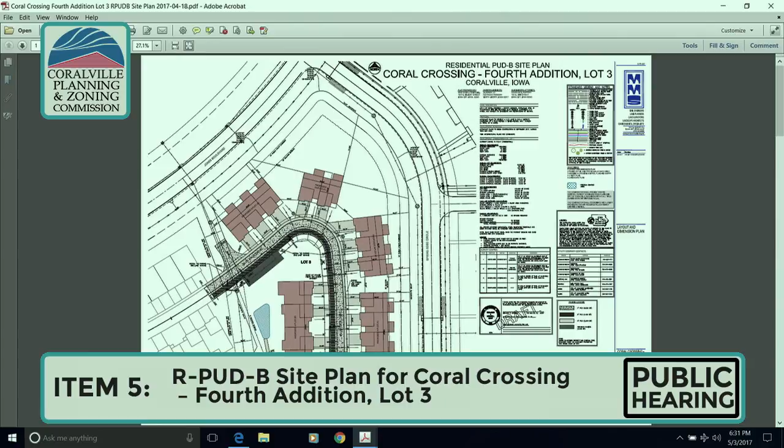Well, Jim, you want to just explain this to us? Yes, I will. Previously, we've done a PUD-B site plan for this area, and we've approved it. So they bring in each section that they do. This is the 4th Addition Lot 3, and there'll be another lot in the 4th Addition as well, already under construction actually. But this is just as the PUD-B site plan was. It's got 2 3-plexes, which you see up on the top, 2 4-plexes on the south edge, and in between a 3-plex and a 4-plex is a duplex. So they haven't changed anything. It's all as it was approved through the PUD-B site plan. So there's really no changes to discuss or anything like that.

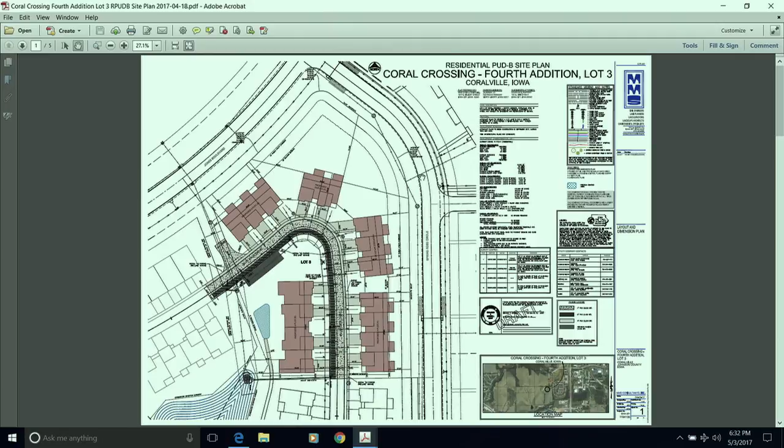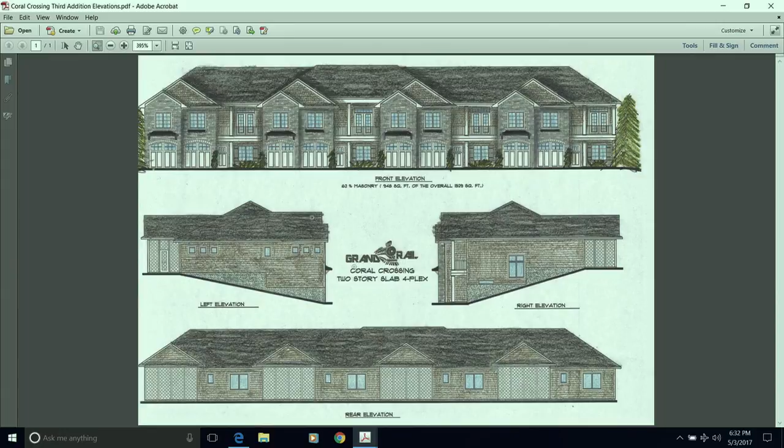I believe you have the building elevations in your packet. Primarily it's brick and siding on the front. This is a 2-story, you can see the brick. It's hard to see, but there's brick on the projections out of the building, and then some brick over the windows and around the front doors, and the rest is all siding. So these also were part of the PUD-B approval as well. We've looked at all of this before.

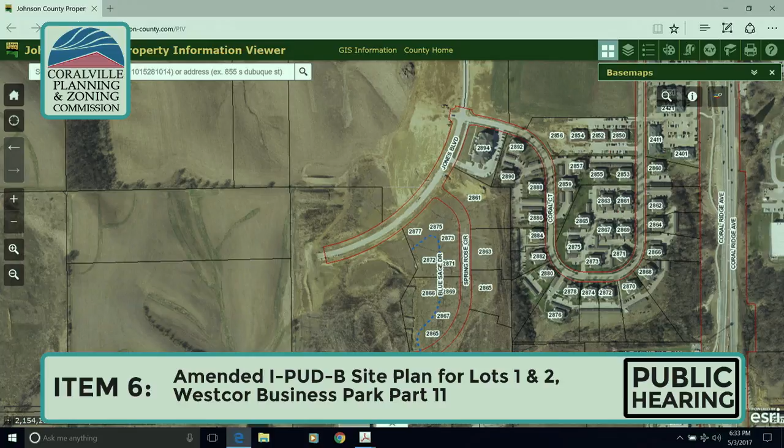Agenda item number 6, public hearing request by Zero Energy Systems for the approval of the amended IPUDB site plan for lots 1 and 2, Westcor Business Park, Part 11. Do I have a motion to consider the approval of the amended IPUDB site plan? So moved by Snyder, seconded by Taylor. Discussion.

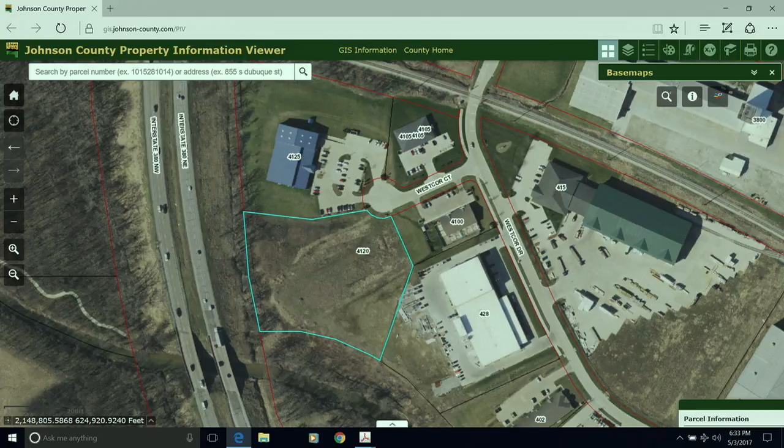This is, as it says on the submittal, Zero Energy. What they've done is acquire the second lot, 4120, that Scott has outlined in green, to add to their original site and their original building. And then just north of that at 4100 is Dogs Daycare, so you can get a feel for where this is. But what they have done is added lots 1 and lot 2 together. They've purchased lot 2, and on lot 2 they want to put another building. It's a 3,900 square foot building.

It's going to be part storage building. There's going to be some office areas in it, and they're going to have 2 dock doors, one on the south and one on the east, that they could back trucks into.

They will be loading their walls in here that they manufacture. They'll be loading those in there. They'll also be keeping things in here like the styrofoam insulation that goes between the walls and some

rebar and other material like that. Then as part of the site plan, they've incorporated all of their employee parking into the back of the building. As you can see where those white islands are, that is all spots of employee parking.

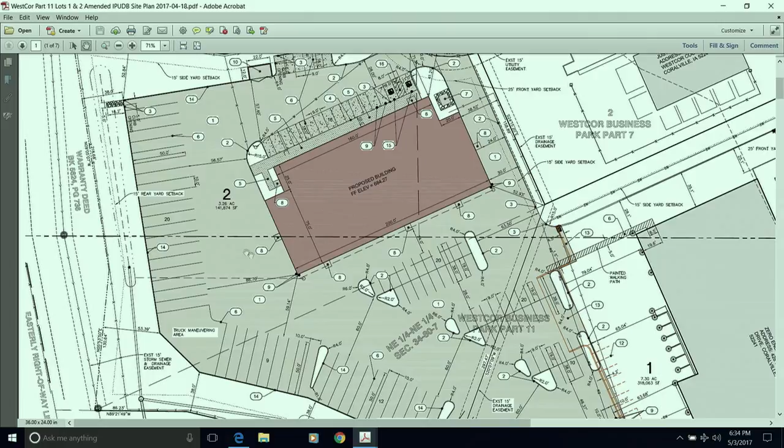And then around the perimeter of it, you'll see some long parking stalls. That is for storage of flatbed trailers that they're going to use to haul their preformed walls on. So there's 66 stalls back there, which is quite a few, and I'm not sure they'll have that many sitting back there at any one time, but they have the capacity to do that.

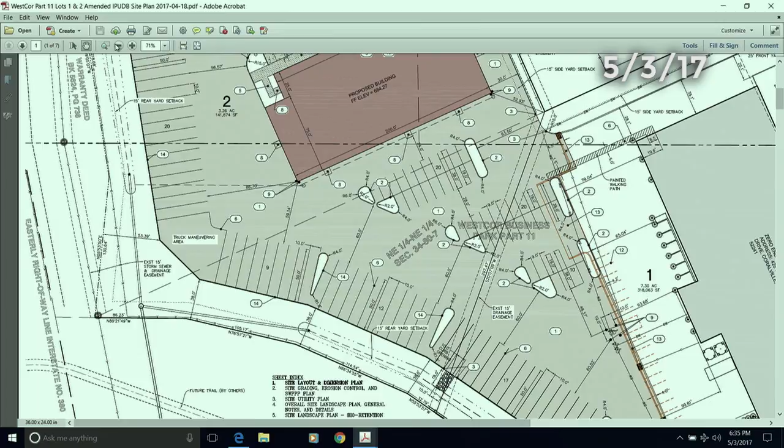So the building, you have that in your packet as well. It looks just like the other building, just smaller. Same thing - it's their preform walls, basically the same as their other building. So the front lower part is the office area, and the back part is the storage area and the loading area.

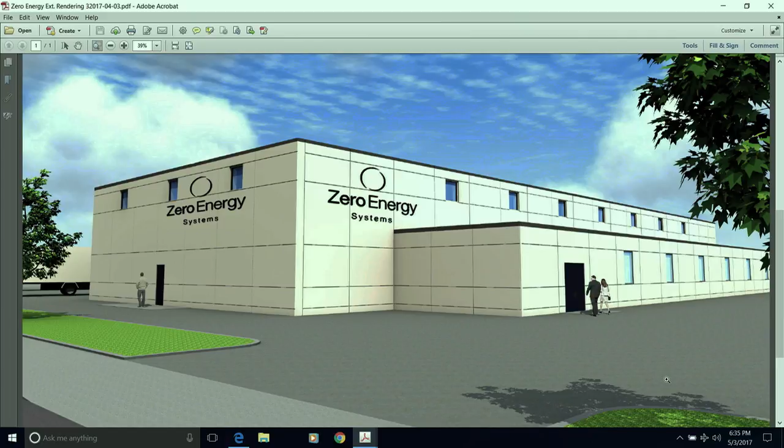going in out there. All right, we will now vote on the approval of the amended IPUDB site plan. All those in favor say aye. Aye. Opposed? Motion carries 5-0.

Do we have anything newsworthy for next month? We have several submittals for next month that we're just beginning - they just came in on the 1st, so we're just looking at them. We have 2 more additions in Coral Crossings, which we just looked at on the east side of Spring Rose Court. There are going to be 2 36-unit buildings in there, lots 2 and 5 of the 5th addition.

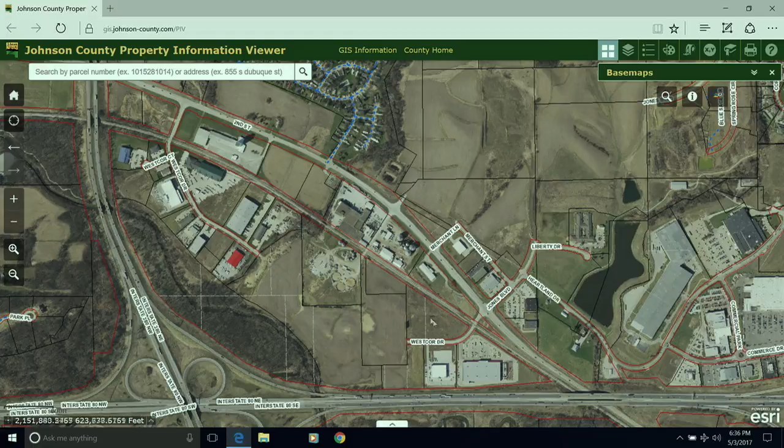Let me get my brain going here. What else do we have? There's Westcor... yeah, we have Westcor subdivision, which is the triangular area right across from Tyson's on Westcor Drive. That's going to be subdivided into 2 lots, Lot 1 and Outlot A, for some future commercial development.

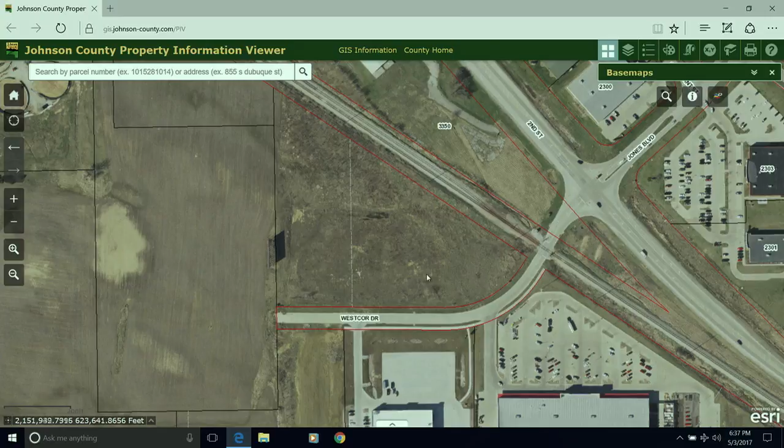On Coral Ridge Commerce up on 965, we've already approved a site plan up there for 2 buildings in the strip mall that Build-A-Suit is going to do. One building they already have up there. The second building they haven't done yet, but they want to amend their site plan to change that building - modify the footprint, not so much the square footage. It's basically going to be the same, but they're going to modify the footprint so they can have a drive-through on the south side of it.

I think the idea is there'd be a coffee shop or coffee house in there, and they really needed the drive-through. So they modified the drive coming around the back of the building and around the south edge, so they have a drive-through lane they can pull off, and then they have a bypass lane as well. Basically the parking and everything else on the site stays the same - just the look of the building is going to change. Building materials and everything will remain the same.